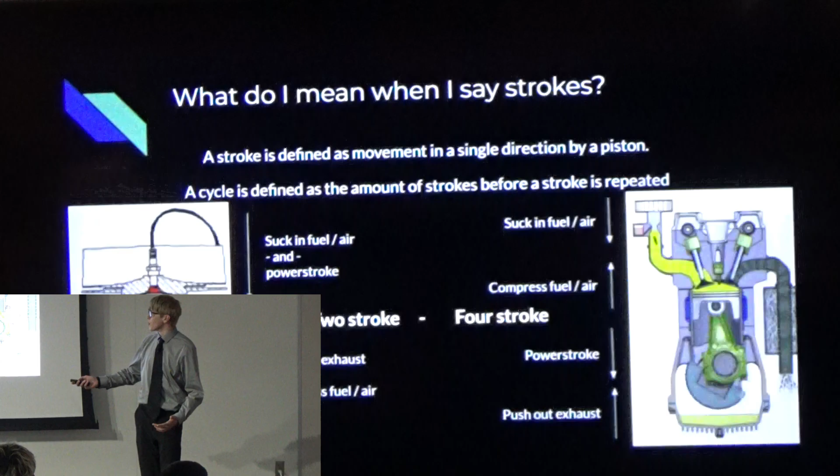So now I'm guessing a lot of you don't know much about engines, so let's just quickly go over them. There's two main types of engines for gasoline at least: you have 4 strokes and you have 2 strokes.

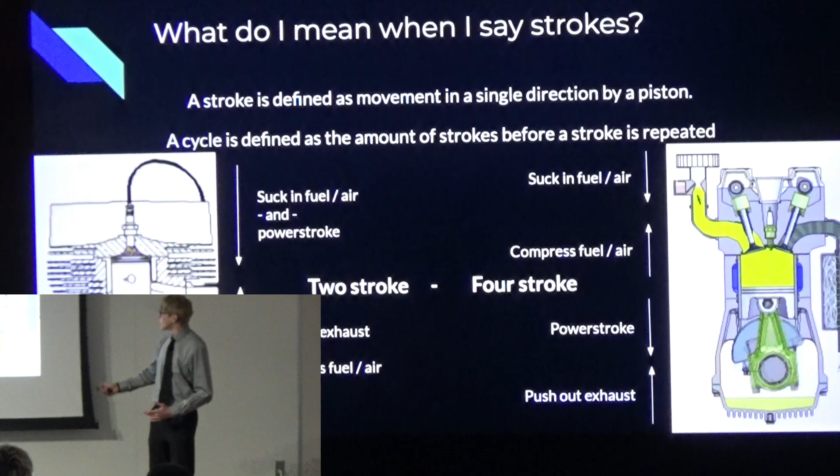So what a stroke is, is defined by every time a piston moves in one direction. So for a 4-stroke, essentially, which is in all of your cars, it will suck in fuel and air, it will compress it, it will explode and come down to the power stroke, and then it will expel the exhaust.

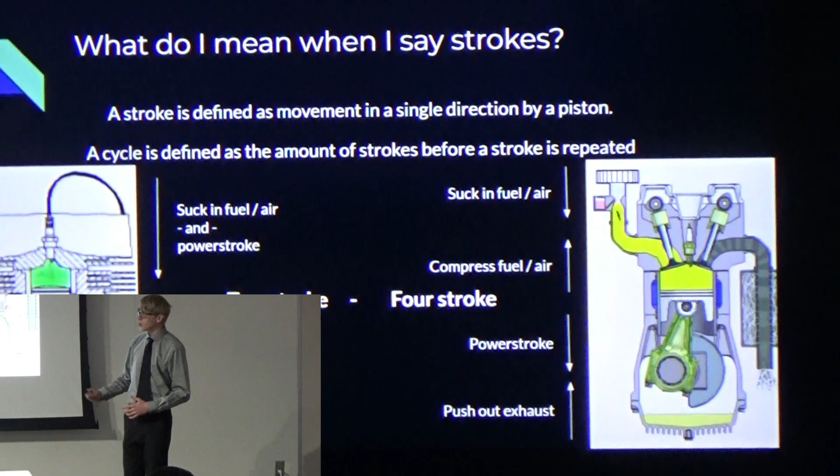So as a 2-stroke, it just does it for 2. So it compresses, it explodes, right? But then it sucks in fuel and air and power strokes, and compresses and sucks out the exhaust. So for every cycle, there's only 2 strokes to it.

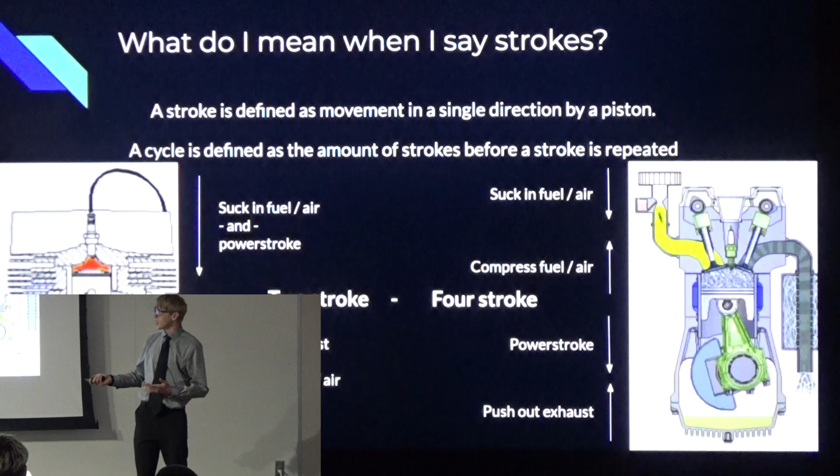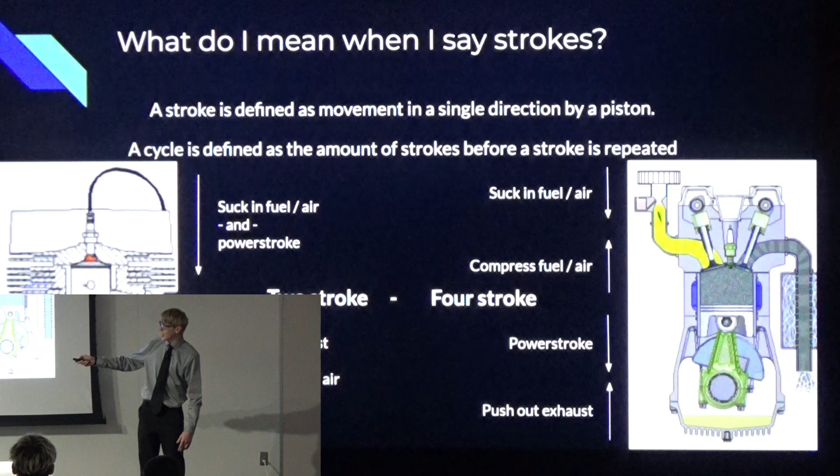So what is happening is, just because I know not a lot of you know much about engines, let's quickly go over a couple of the basic parts. Okay? Piston. This thing right here, this is what generates a spark to start the explosion, therefore we call it a spark plug. I love engineering terms.

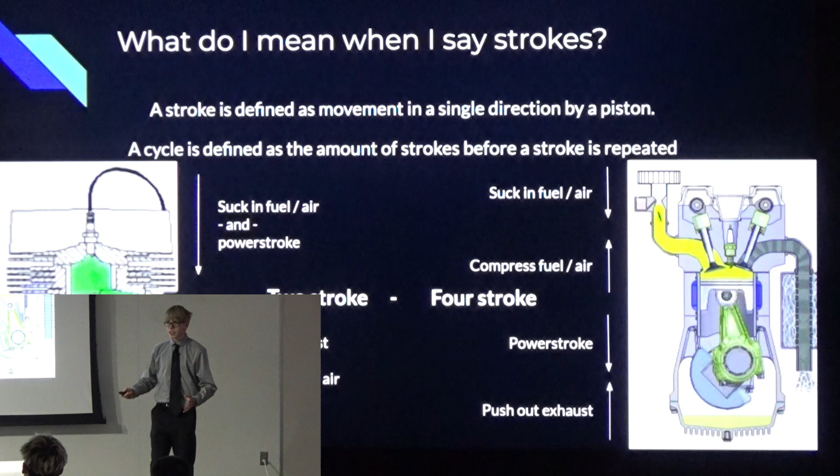This rod right here connects the piston to the crankshaft, the connecting rod. Anyway, the thing that spins is called the crankshaft. That's what delivers the power from the motor to the transmission, essentially, from there. So the piston's actually what does most of the pressing, etc. I think you can get it from here.

Alright, so then let's just go over some more engines that they're not necessarily stroke-based, because we have rotary engines that are just not considered stroke-based because they kind of defy what we think of as a stroke. And if you try to define this, then you quickly run a problem with something like a Soviet 5-chamber rotary engine. What the crap is this?

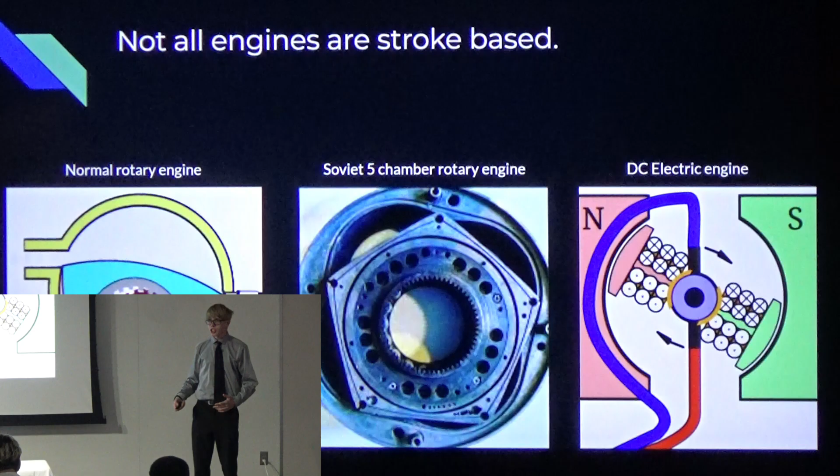Anyway, so we also have electric engines, and just because of how they're made, we don't define them as strokes. So, just clearing that up.

Now there is one company that claims that they have a 1-stroke engine. Now the thing is though, it's not a 1-stroke. Everybody agrees it's not a 1-stroke. Nobody really knows what it is though. In essence, it uses 2-stroke philosophies for 2 pistons that do 2 motions before the cycle repeats. Therefore, it can be classified as a 2-stroke.

It is pretty cool though, because it's 500 cc's of displacement, which is really small for an engine. A lot of motorcycles have engines that big. And then 120 horsepower is actually quite a lot. So my Jeep makes 190.

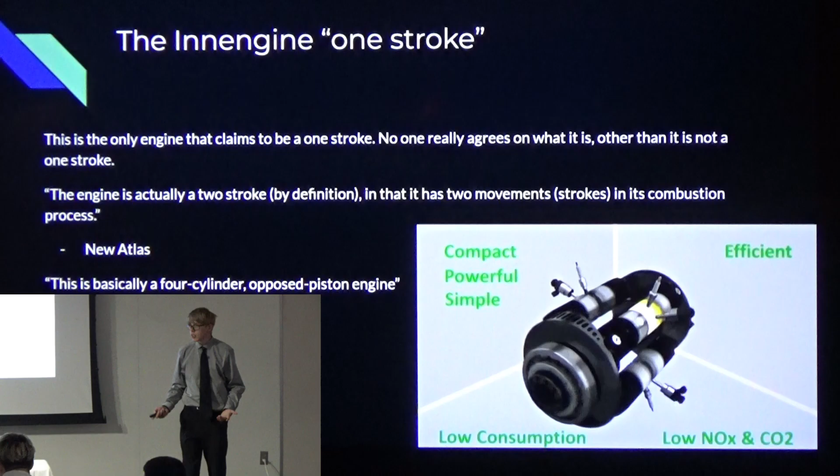So then, who am I? Well, I'm a wrestler, I used to race motorcycles, I'm a certified SolidWorks professional, and I'm a hiker, backpacker, scouter, and yes, I will be Eagle. My Eagle Scout project will be fully installed by this Wednesday. And then for college of choice, I'm going to be going to Embry-Riddle Aeronautical University in Prescott, Arizona. Don't worry, most people haven't heard of that.

And so who's going to be assisting me with this? Because clearly, I know nothing about engines. So I need a team that's going to help with this.

So we have Jack Close because he has a CSWE. Whenever I need something from SolidWorks that I can't get out of it, I ask him, he tells me what to do, and it works 99% of the time.

So then we have Ian Williams, because I have 3 other classes with him. And so naturally, it's great to bounce ideas off of him at any time. If you've ever taken any engineering class, you know that sometimes you get ideas at the most random spots, so he's just great to bounce ideas off whenever.

And I have Kevin Schmitz, he's my future advisor. He gives me solutions to problems that aren't yet there.

For example, I asked him, how do you like my chamber? And he said, your chamber's really long, so your connecting arm is going to snap. I didn't care. I'm like, great, how's my chamber? Meanwhile, the next day, at the end of class, I put in my connecting arm, and I'm like, okay, well, Kevin was right, it turns out, like always. And then nothing was said to him. So he's my simulation saver.

We'll get back to that in a minute. And then Kyer is my honest monotone opinionator, because sometimes you just need someone to look you in the face and tell you exactly what you need. And then Jay Stranger-Thorsen, he's my enthusiast and outside mechanical advisor, and he's also my dad, so he can see the broad overview and not what happens every single day.

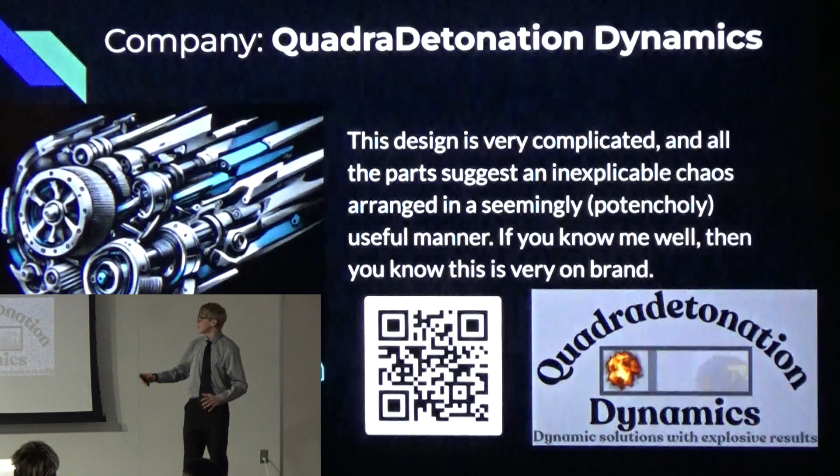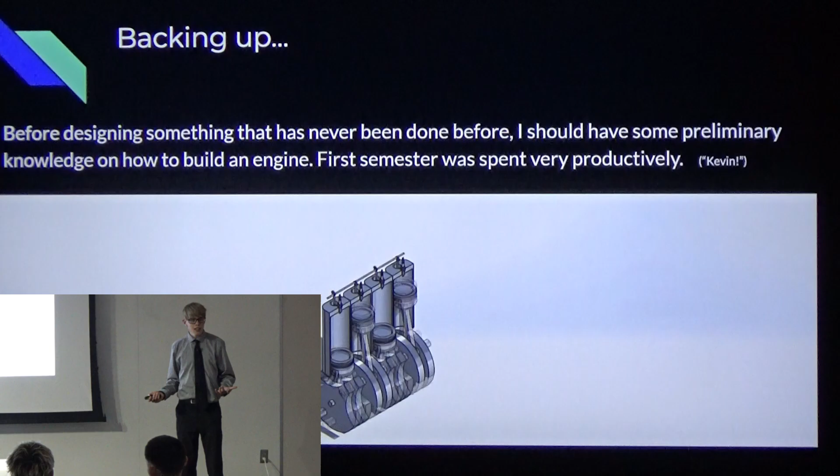So some initial final designs. This is where Kevin was extremely helpful, more so than even one of my expert advisors. He took a piston looking like this and a connecting rod looking like this and turned them into these, because I got really lucky. He had to download solvers on his computer for his project to work at all, which meant he could look over my shoulder while his computer was doing computer things and tell me exactly what I needed to do. This set the groundwork for how in-depth I wanted my model, non-lopsided, so I could confidently state that this is what an engine looks like, not this. This just looks like a valve.

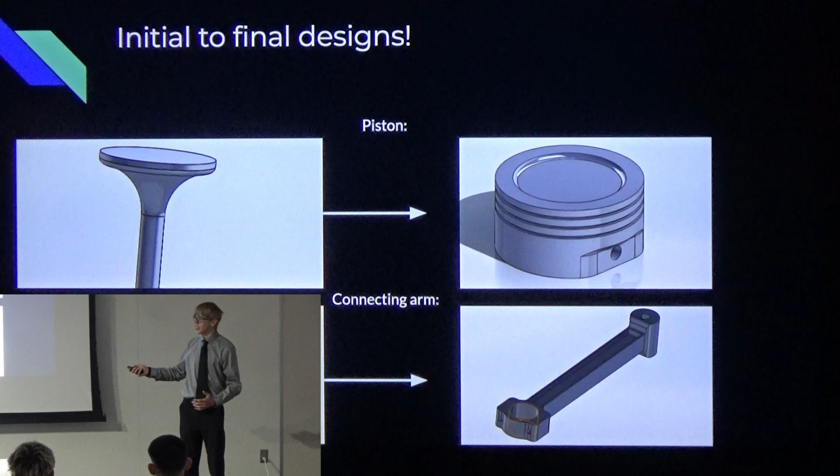It might be a valve. So then I took that knowledge and that level of depth and added it to the crankshaft, which turned out great as is. And then I took a picture of a spark plug and built one in reference to it, and honestly that came out really well.

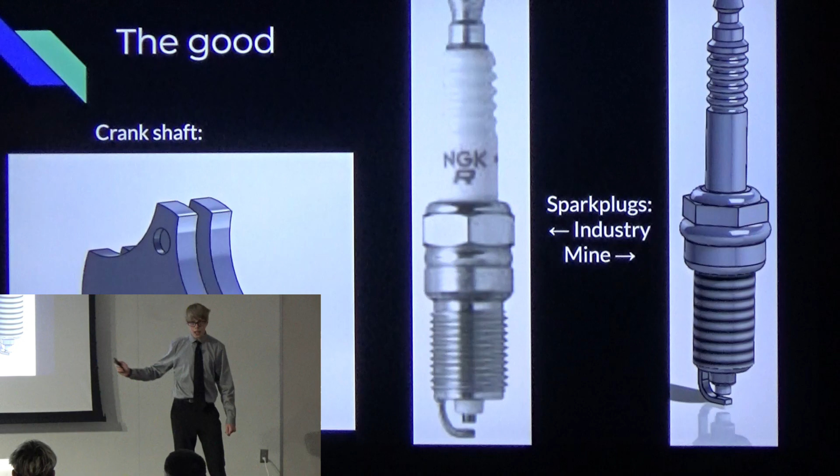And then, of course, we had the bad. This simulation is 5 FPS. So whenever you say your game is running at 1 FPS and it looks like this, it's not. It's 5 FPS, come on.

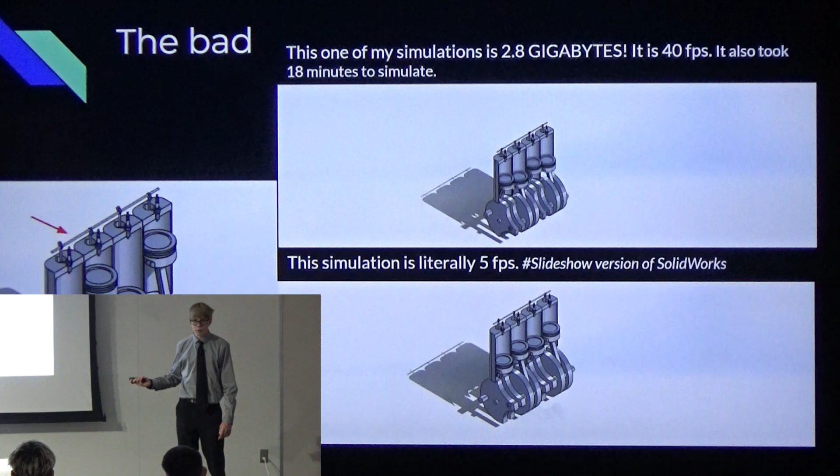So there's just one problem with the engine I showed you earlier. This is called a camshaft. It's what makes the valves go up and down on a basic level. You can see it right here. The problem is you need an intake valve and an exhaust valve per chamber, which means on this model I would need two camshafts. And that's not how engines are built. That's not how engines work. Also, it took 18 minutes to simulate.

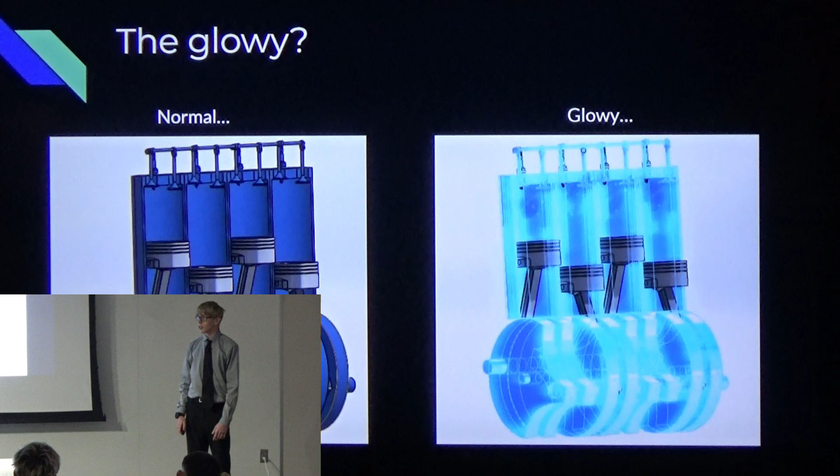That was fun. So then I also had to look into this. I don't know why it did this, I don't know what setting changed. My own computer doesn't do this, my computer for engineering tech doesn't do this. Only this computer, look, I don't know.

Software doing software things. So then we get to the end product. You can see that I did consolidate the camshaft into one, I didn't have to have two. And this actually took quite a while to do. It took like an hour just to rotate the chambers, just because of how I built them in the first place. But overall, this actually came out pretty good.

In case any of you want to build your own engine, I don't know why, but if you want to simulate something like this, don't simulate the pistons. Simulate the crankshaft, yep, the crankshaft will spin. It makes your life significantly easier. Just like that. Don't worry, this is the longest simulation I have.

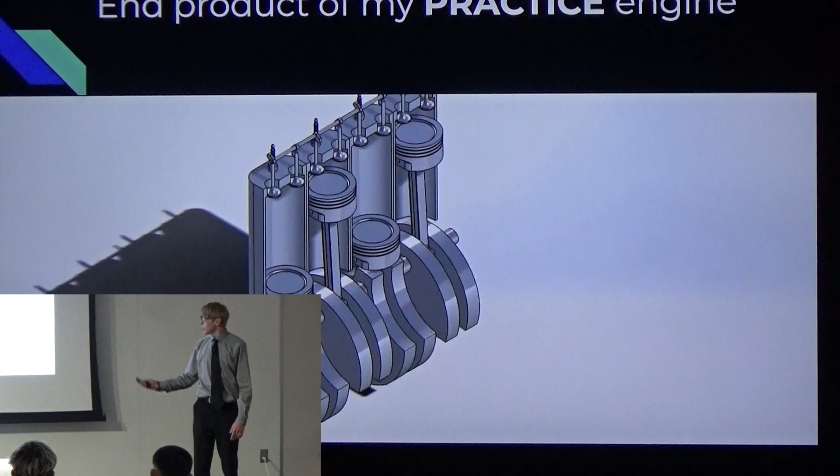And that's it. So, timeline first semester: by the fourth to last week, I was 3 weeks ahead of schedule. I ended on time. What do you think that means for how long I spent simulating this stuff?

I just planned a week of simulations, and it ended up being 4. And because I got all of this done, I built my model very, very quickly, and then just simulated for the rest of the time. I got stuck doing simulations for a while.

It's perfectly fine. So the mid-year review, honestly, the package turned out way better than I thought it was going to turn out. And everything was going extremely well. I got ahead of schedule at some points, and there's just 2 things that went wrong.

I put valves in a 2-stroke, because that engine was supposed to be a 2-stroke. 2-strokes don't have valves, that's not how they work. They have openings and very complicated mechanical contraptions called expansion chambers, which essentially create a vacuum with 0 moving parts. So these openings don't have valves. Not a good idea. You can see, no valves, openings.

And then I could not figure out how to do a flow simulation. This is also when Kevin really helped out, because his project was pivotal on flow sims. So naturally I was like, okay, I'm going to do a flow sim, and Kevin's going to teach me how to do it. 3 weeks later, and Kevin got his first flow sim, I decided that was not going to happen.

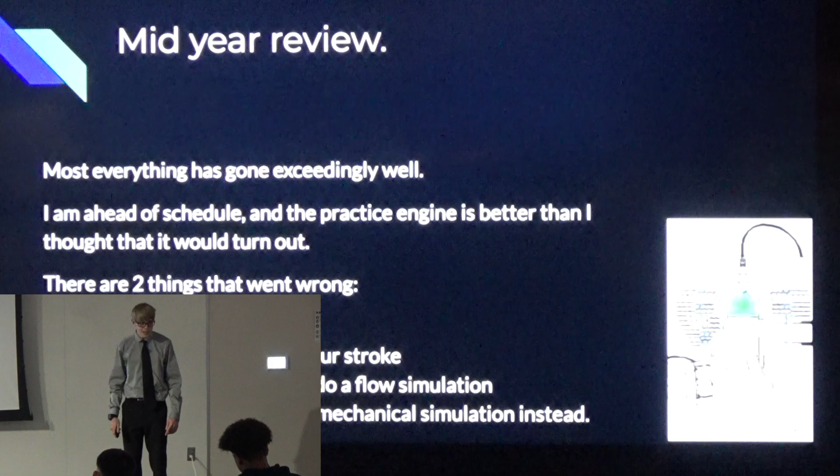So how could a 1-stroke engine be made? Because this is my capstone project, all the others was just me learning how to do an engine. So how could a 1-stroke be made?

Well, I had 2 kind of scratch designs that I put down on the whiteboards in the cabinet. One of them, they both kind of presume the same philosophy of using both sides of the piston in order to create 2 chambers with the same piston. This means that if I use 2-stroke philosophies on both of the chambers, then it will explode every single time the piston moves, thus creating a 1-stroke.

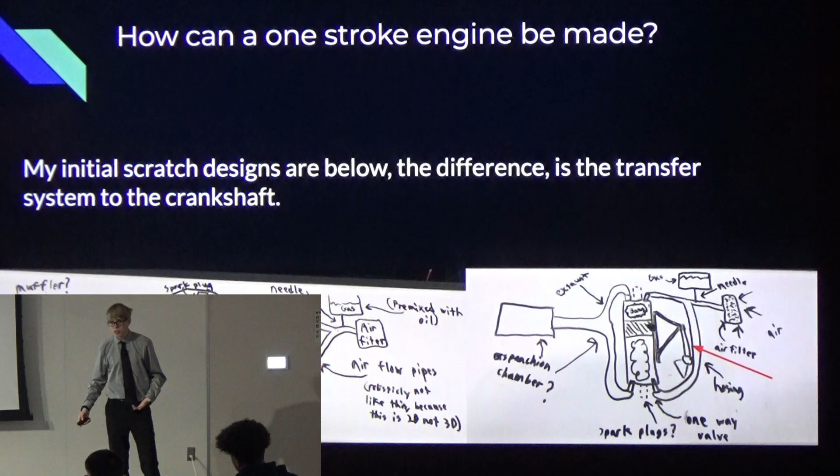The only question was do I use a sleeve design around a big crankshaft, or do I do more of a normal kind of crankshaft design with a connecting arm and then add a contraption to it? I went with the sleeve design since I just thought it looked better. Little did I know. So, first attempt, this thing snapped instantly.

All of you can tell me that, I don't care. So what ended up happening is that I learned that if I have a displacement that I want the piston to get per chamber, and I know my compression rate, I can then solve for the radius of the piston and how far it will travel. So if the piston travels as far as the diameter of the crankshaft, and the connecting arm needs to be twice the length of the crankshaft, I can build a function that tells me the length of the connecting arm as it relates to the radius of the piston. Using that, I can build a model that doesn't absolutely suck.

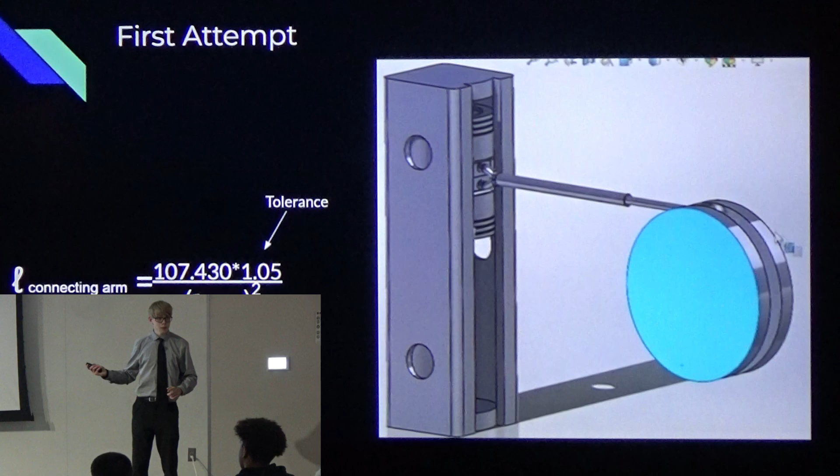And so I had some explosions along the way because SolidWorks doing SolidWorks things. You know SolidWorks, this is quite common. So right there you can see part of my crankshaft with these outer parts, or the 4 outer parts that were coming in the other parts.

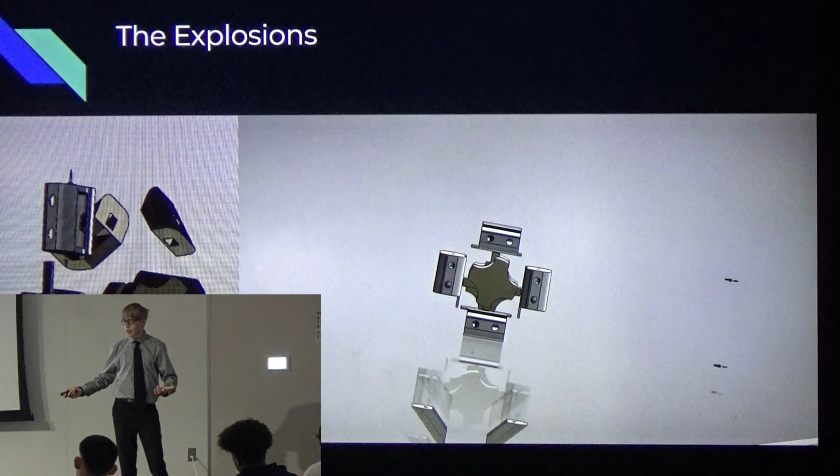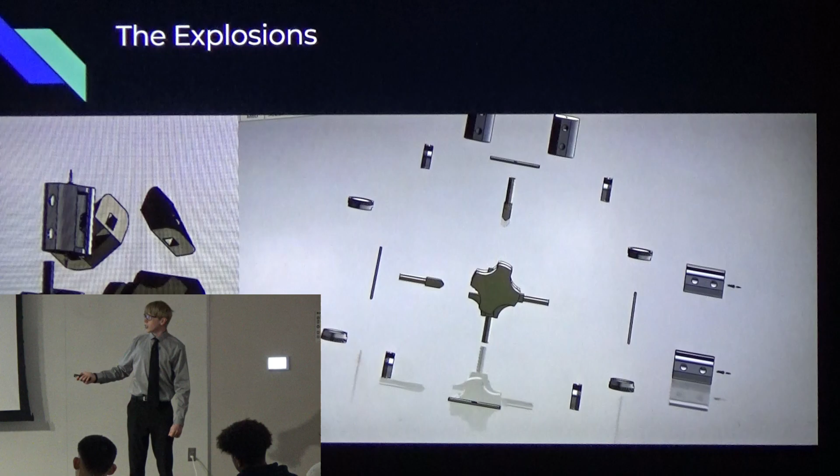These giant bricks here, that's essentially my engine block with the chambers, the spark plugs, and the pistons. The reason they're separate is because I was too lazy to put them into one model since I had an earlier project, my preliminary engine, and I just copy and pasted the spark plugs and also the pistons. Just to be sure, these rods right here contain the pressure since I have something sticking out of the chamber.

And then moving on, why did this take so long? Because I did a bunch of simulations, and in almost every single one of these simulations, at least one thing is different. I would simulate, realize I did something wrong, fix it, and resimulate. I was getting about 2 or 3 simulations per class period, so it was not super productive, but I was at least working every single time.

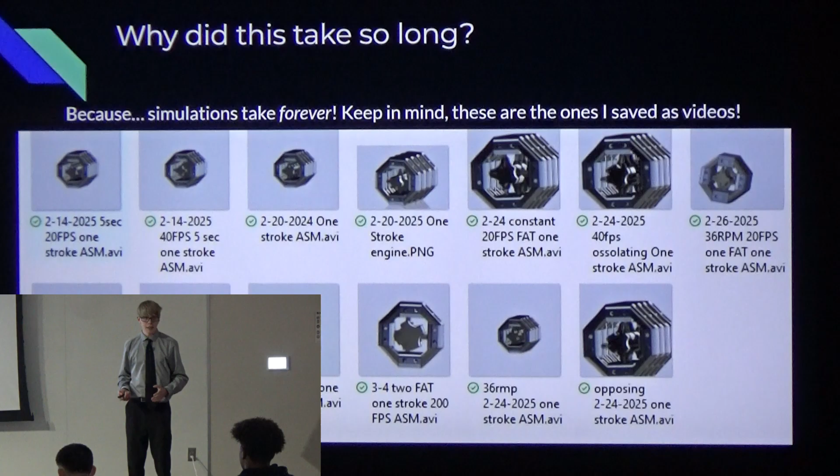And continue some more, because this, I didn't understand it. I couldn't understand it, and I still don't understand it. I don't know why this works. It did, I don't know why. Because you have velocity in the y, but it's linear, so it's like constant acceleration, kind of. Shouldn't that mean... anyway, I couldn't figure it out.

But this was first semester, and it would take like 15 or 20 minutes just to get to this. Then I realized that second semester I could just do this: 0, 5, number of times I want to rotate times 360, okay, and it would do everything for me. It took 30 seconds, so much more efficient. With this, I could change something really quickly.

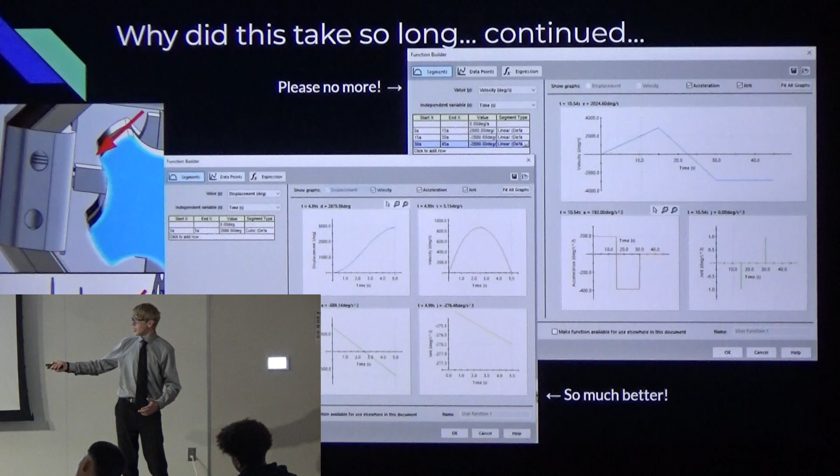Here's this model, for instance. Now this was springs, and I thought springs were cool because I was in physics C, and I could do a bunch of different stuff with springs. Yeah, no, this sucks. My expert advisor looked at me and said I'm an idiot and I should just force it, so I did, and this would be much more effective. So I could resimulate everything, and that didn't take 5 hours of my life.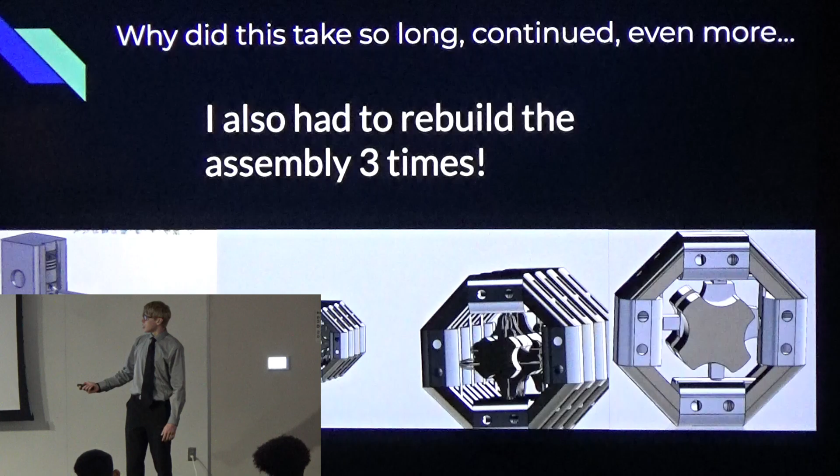So now, because of those errors, I rebuilt my model a couple of different times because it's not worth my time to get rid of all those errors. I tried for 30 minutes, got through a third of them. And so with this, the crankshaft's rotating all at once, and that's how you get a barrel rolling.

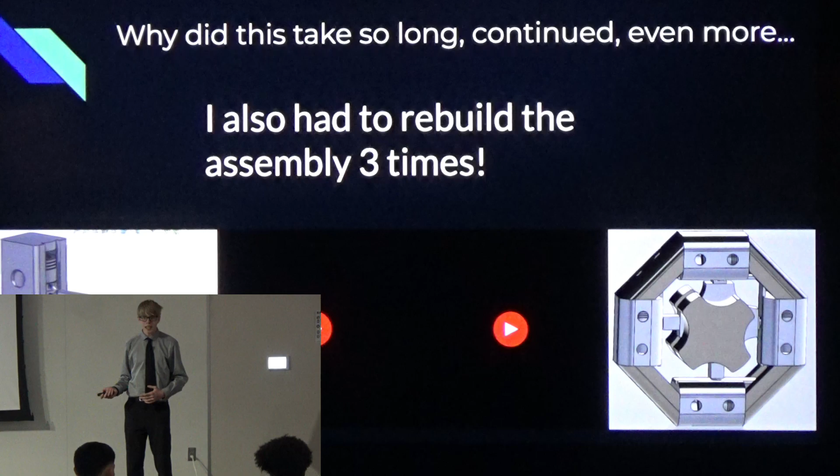That was fun. So this is finally alternating in sync, but I still needed to update my connecting arm design, so I couldn't necessarily keep it. I ended up with this model. The reason this model isn't extruded back is because, remember that explosion from earlier? Right, can't copy and paste that.

So timeline, second semester, honestly I was more or less on time for the remainder of the year because I would fix something, simulate, fix something, simulate, fix something, simulate. Honestly, it went pretty good, except for one part.

Right here, I have it saying print one stroke, print two stroke. The problem is, that's a machine doing it, not me doing it. So naturally, I didn't have any time to do this, like I had free time essentially. I unknowingly built in 4 weeks of free time. That was not good, and there's a giant problem.

I didn't actually start printing because I thought I was going to keep reiterating on my designs. So that really delayed my printing process until almost everybody in this class was using the printer, so I couldn't actually get a good 3D model.

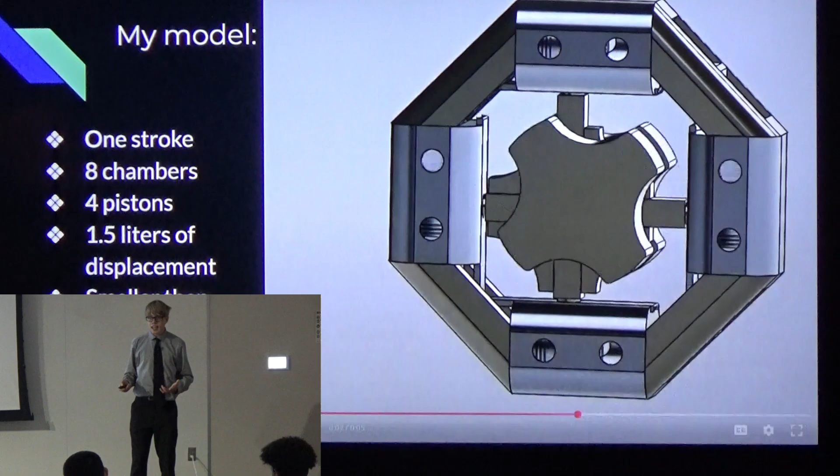You'll see that here. So my end model, it's 8 chambers, 4 pistons, 1.5 liters of displacement. It is smaller than standard designs, and I'll show you just how much in just a second. But it is tiny.

So I took this full version and duplicated it back 4 different times for a total of 6 liters of displacement, and compared it to a Cummins 6-liter engine. It is almost half the width, less than half the height, and less than half the length, while being the same displacement and less than half the weight. Essentially, it's much smaller, much lighter, while still having the same power output.

I give my model about a 20% chance of being viable if we pursue it further, mainly because this engine concept has been around for less than 106 weeks. So it's actually not going to work right now.

So now some calculations. I did a rough ballpark estimate — each chamber of mine is 187.5 cc's, so one ring comes out to 1.5 liters. Then I took a 125 cc two-stroke, which makes about 30 horsepower, and calculated my engine using 30 horsepower per chamber to give myself some tolerance, since I'm not actually good at designing engines — I learned this. If we do that, my engine makes 960 horsepower. A naturally aspirated 6-liter, a normal one, would make between 350 and 400 horsepower. So mine could, in theory, make 2 to 3 times the power of a normal 6-liter engine. My Jeep, for reference, makes 190 horsepower. I know it's not the fastest thing in the world, but 960 horsepower is nothing to joke around with.

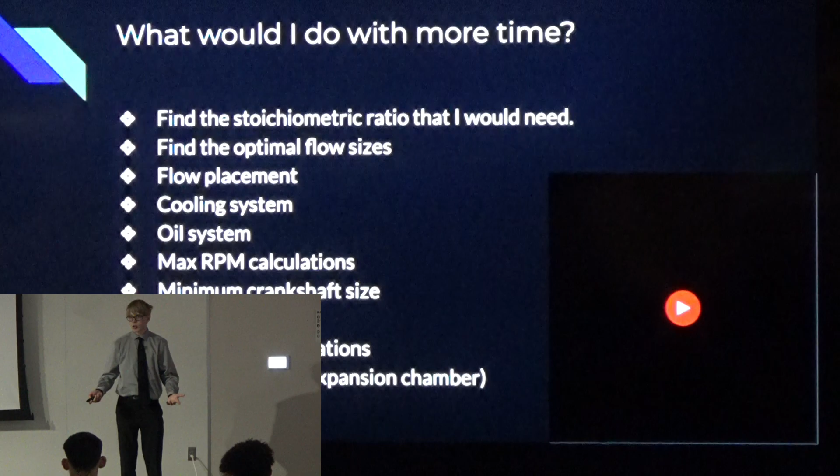Minimum crankshaft size would be needed too, because a crankshaft is used to propel the piston back up — but my piston explodes every single time, so I don't need that. That's where a lot of the weight savings happen, so how can I minimize that crankshaft? Stress tests would also be nice, just to understand where it would fail, as well as power band calculations, because 2-strokes don't make power evenly across the board — they make more power in a narrow RPM range, like 1,000, 2,000, or 3,000, depending on specifications, versus a 4-stroke. That's why you don't see them in cars. And then also an exhaust system, because expansion chambers would take a year in and of themselves, and I might want to patent it, I don't know.

So what do I hope the future holds for it? Honestly, in its current state, it cannot be built — or at least it wouldn't work very well. So I'm kind of hoping some person finds this on YouTube or something, on their own two-stroke journey, and tries to improve the design, since it's in the file folder. Or I should patent it, I don't know.

So what do I recommend for Capstone? Well, it depends on who you are. The journals are super realistic, but they're super time-consuming, and I don't think a single person in our Capstone class put that into their timeline. So just be wary of that — they are super realistic though.

Companies and career comparisons — if you're the kind of person who thinks you're going to come into the class and immediately start working on something, it's not like that. You have quite a long lead time on it, and it also depends on the project. It needs to be research-based almost to the last day, and I think that heavy emphasis is what got me ahead of schedule. Because the last journal we did was journal 5, and we had 3 weeks to do it, but I was 4 weeks ahead of schedule. So that really messed me up.

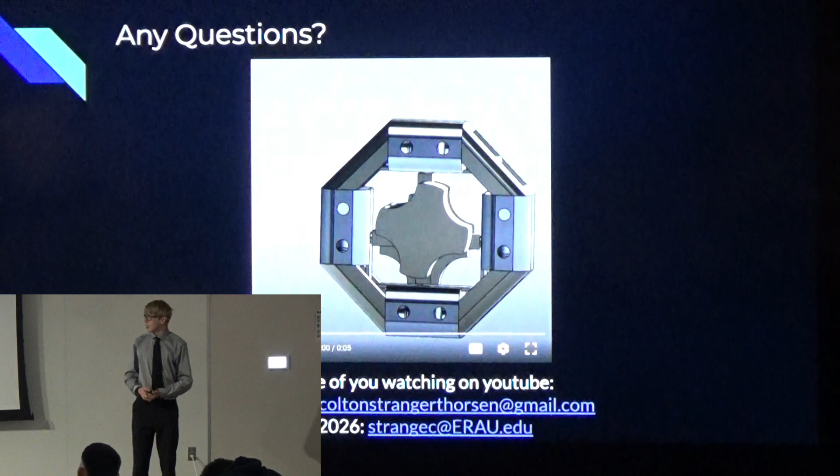Questions? What would the advantages be over other engines, and how does it compare specifically to electric engines, as the car industry is generally shifting towards that? I don't research electric engines enough to understand the comparison between this engine and an electric engine. Although compared to gas engines, this engine is significantly smaller and significantly lighter, while delivering significantly more power for a significantly shorter amount of time.

Yes, Jarrell? That 960 horsepower metric for something that's like half the size of a V8 is incredibly, I want to say, terrifying. How did you get this number? So how I got the number is, I'll go back to that slide that you're talking about.

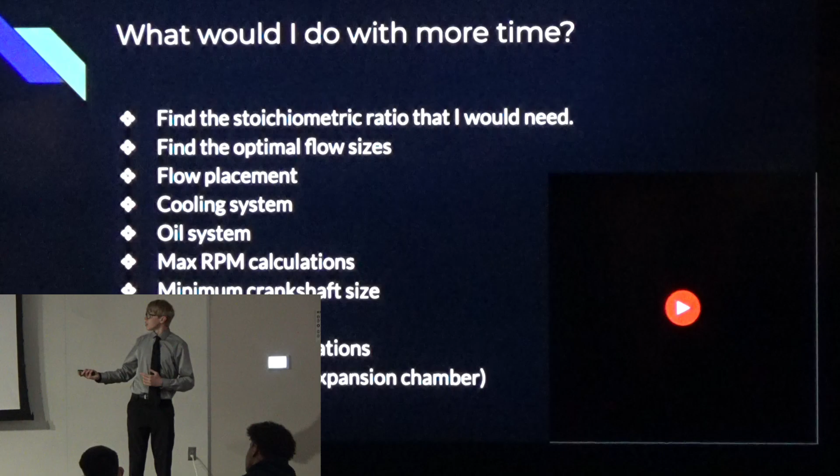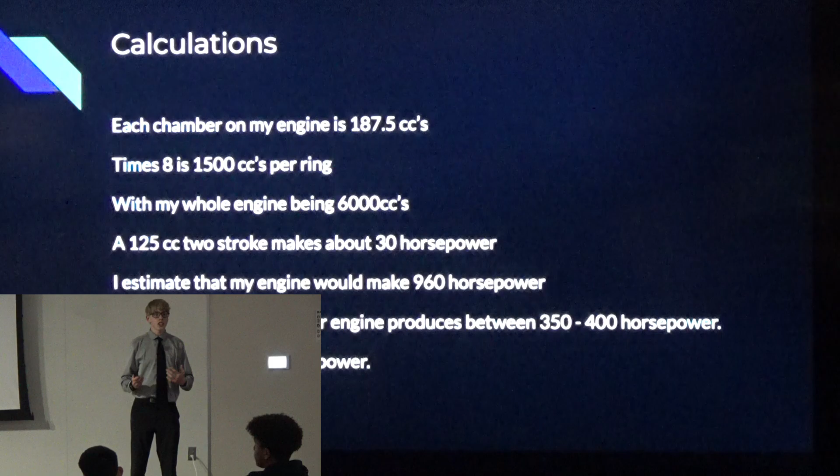Right here. So what I ended up doing is each chamber on my engine is 187.5 cc's. And a 2-stroke dirt bike, one of the models is a 125 cc bike. So what I did is I took the power output from this 125 cc bike and estimated that that's the amount of power each chamber of mine can produce, since I knew there's going to be quite a lot of loss with my design. And so when you multiply that through my entire engine, that's how you wind up with the 960 horsepower.

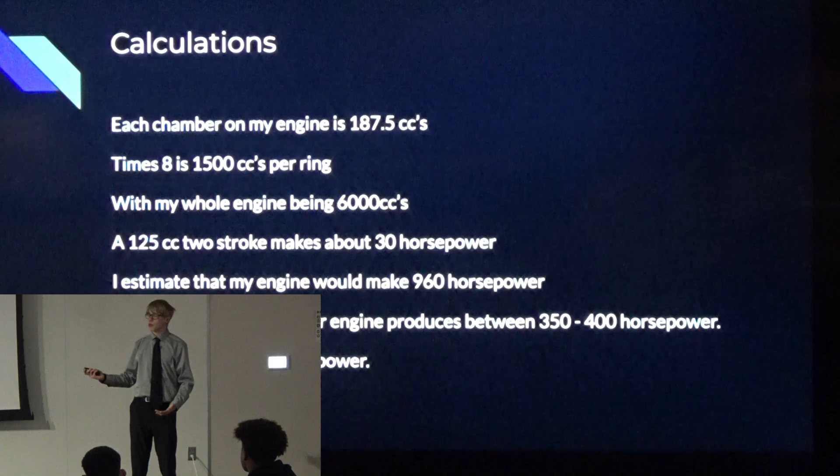Yes? Sorry, one more thing. So because it's one stroke and you're going with cylinders that are rotating like this, have you considered the effects of knocking on your engine and it potentially not even working after, let's say, 40 cycles?

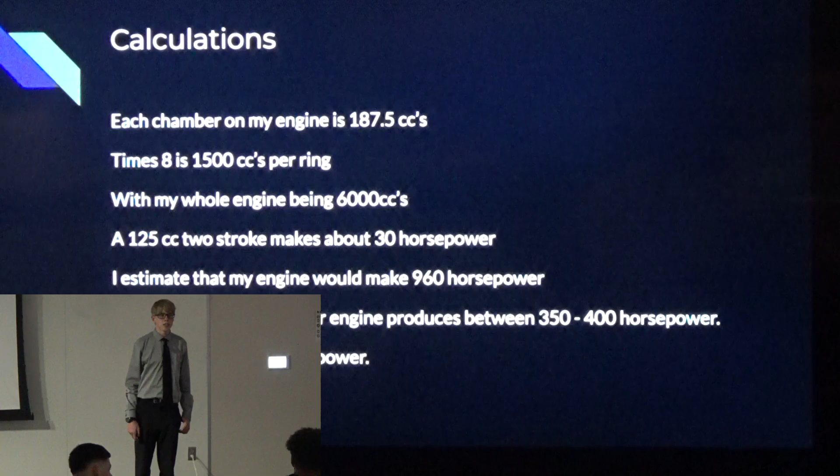Have you done anything to combat that? So, sorry, can you repeat that? Have you accounted for knocking within your engine where slight misalignments could cascade into large, massive system failures? In its current design, knocking is the least of my problems because there are many things that would destroy the engine much faster than that.

Will that be a problem? Yes. Is that a problem for me right now? No.

Yes, that's all? So even without considering your own one-stroke, do you believe one-strokes in general have a future here, or is it limited to 4-strokes? Oh, I don't know, but I thought of designs that could kind of help, and I was curious if it would work or not. And my only other capstone idea was a shoe, so I went with this.

I'm not joking, it was literally...

Yes? I might be repeating a question he just asked, but I didn't hear it. Did you do a torque calculation ever? No. The only one I did just spit out a number that clearly wasn't real, so I think I messed up on my physics.

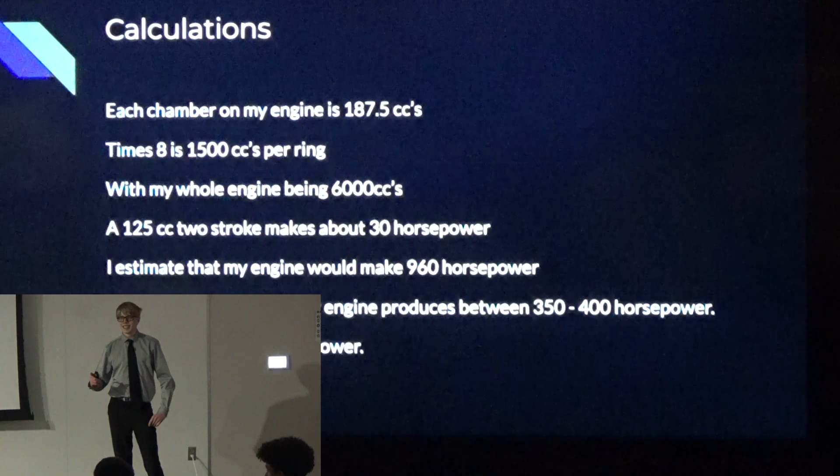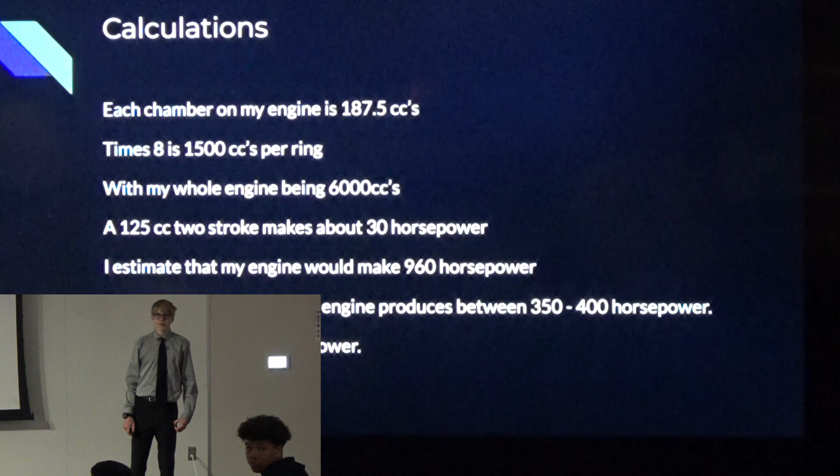Yes, Kevin? Do you ever have a plan to actually cast a block for this, or will it just be basically the piston sticks? No, I did not have a plan to cast this for a block.

Really? So if you were to keep pursuing this, do you think you'd like more focus on longevity, or would you use it like motorsport?

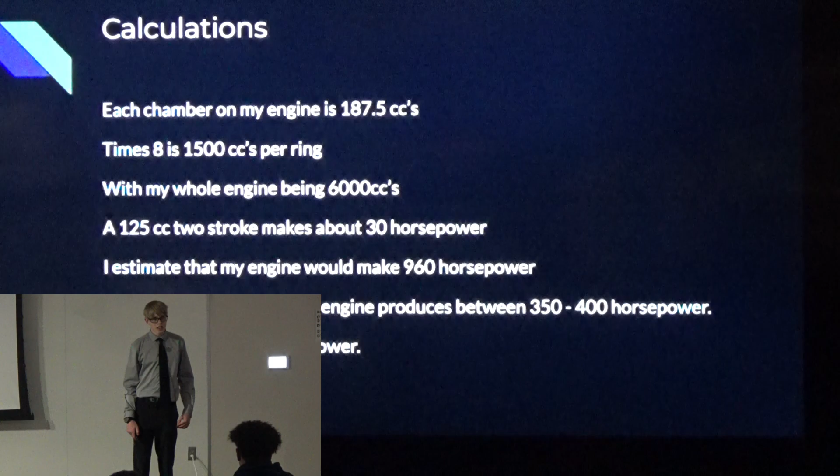That's a great question. So I think my primary focus would need to be to build it, because I actually found a failure point that I didn't know about until I started 3D printing it, and I realized it was a huge flaw. It would snap after like half a rotation, essentially.

Ooh. So I would need to build it in order to find out what I would need to fix in order to make it have a higher longevity, essentially, is what you're saying. So I guess I would focus on longevity more so than power, since it makes a stupid amount of power as is.

Any other questions? Hey, did you model yours after more like the Wankel, the rotary engine? It kind of, I mean, the motion is very similar, but I did not model mine after a rotary engine.

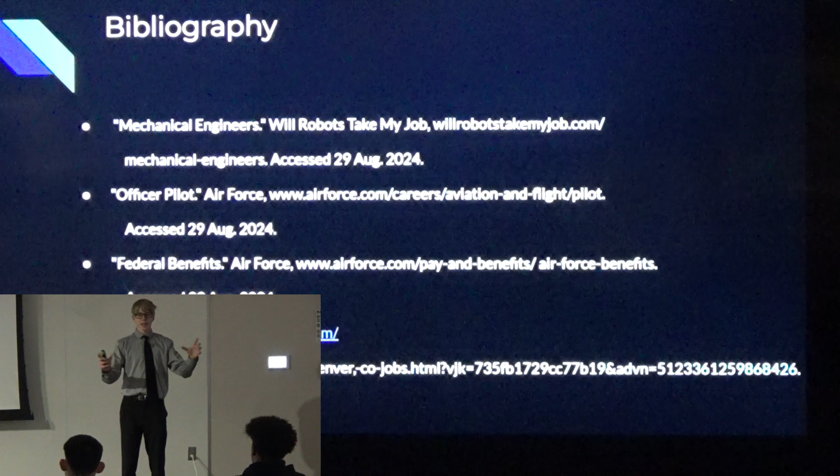What I did is I just took my model and thought, oh, that looks like it could be mirrored. So I mirrored it. And I'm like, oh, that looks like it could be rotated. Hey, it could be rotated. Look at that, okay, that works.

All right. Any other questions? All right, good job.